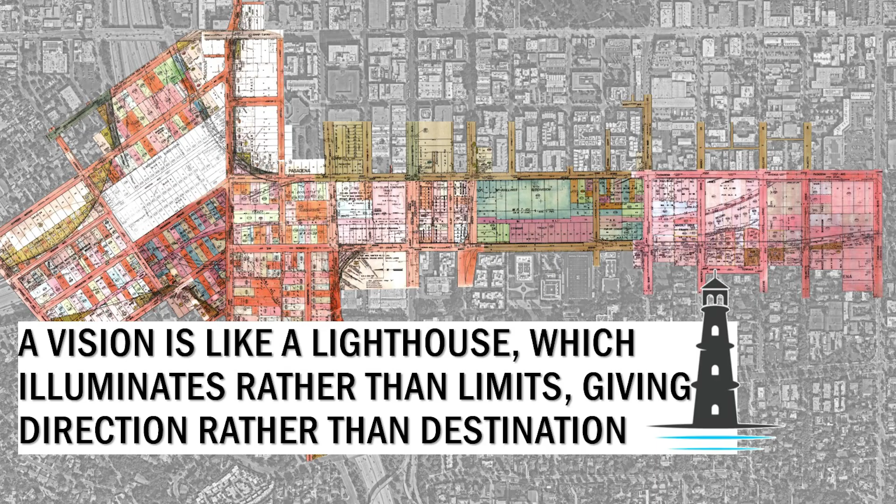I found this quote: a vision is like a lighthouse, which illuminates rather than limits, giving direction rather than destination. So our job today is really to think about where we want to go together as a community and identify our desired outcomes.

Next slide, this is the schedule. We've had three phases of this project. We started in 2024 with our discovery phase, and you've heard a fair amount about that from David and Jennifer. That's where the consultant team came on board to really try to dive into the district and see what the physical, policy, and transportation framework looks like.

Now we're in what we call options and engage. For this, we're doing a series of tests and findings, schemes and test fits. You can think of it as a series of stress tests. Then once we finish, probably in the fall, near the end of this phase, we go into what we call document and refine.

That's when we take the input gathered today from our advisory group members and the various standing committees, refine what we heard, and document it into a series of recommendations that describe these desired outcomes. That's the vision. You'll see that little lighthouse pop up every so often to remind you this is a vision plan.

This is, as you heard, our third citywide event. We've had some really fun events previously that you can check out online, with lots of materials.

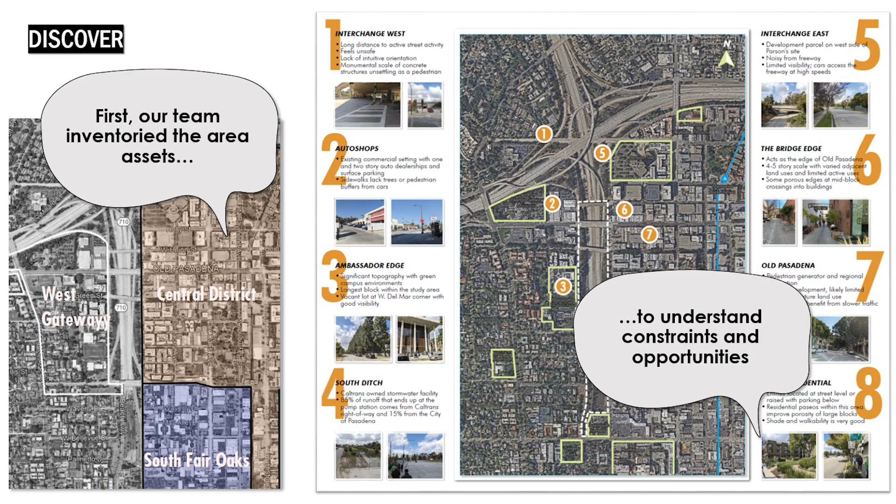With discovery, as mentioned already today, we've learned a lot about the history of this unique site, and you can see those boards in the gallery. There's a series of documents available online, and Brenda is going to walk you through that.

One of the first things that was important to do was figure out what was in the area before the displacement came. As a city, we wanted to look at three different areas. We wanted to know who was there - what people, institutions, businesses - so we hired three consultants to do a little different work for us.

The first group we hired, out of UCLA, looked at racial segregation in Pasadena and the role of freeway development and institutional mechanisms - what was it back in the 1960s and 1970s that caused a lot of our segregation, and actually prior to that. We have this amazing study completed for us by UCLA, and all of this information is available on our website. If you need to know how to get there, we'd be happy to show you.

Next, we wanted to document what was in the area, so we hired consultants named Architectural Resources Group to tell us actual numbers. Let's go to the next slide, and I'll give you a snippet of that.

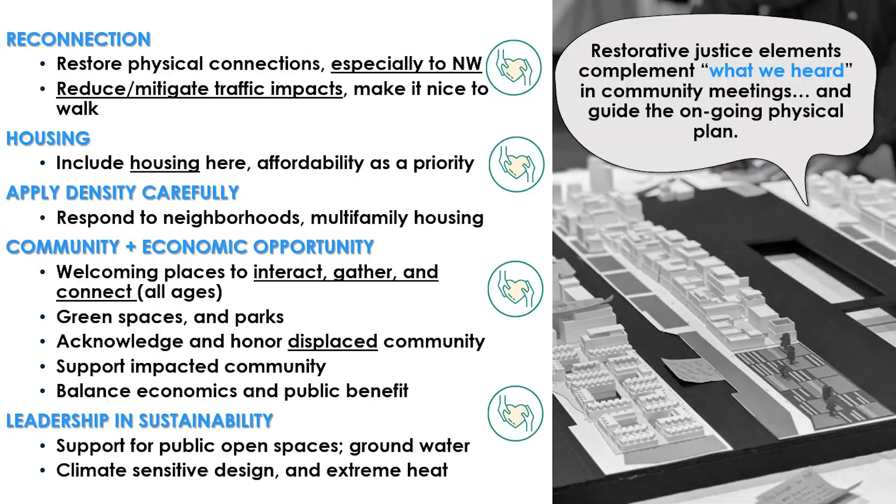And then, of course, we heard a lot about Pasadena being a leader in sustainability. So there's a lot of support for us to think about both water and power, and David brought that up earlier, as well as climate-sensitive design. We've looked at extreme heat, and those are things we're going to talk to you about as we continue.

Back to you, Brenda. What we're going to do now is just ask the panel some questions. I know we've presented a lot of information, and you're probably sitting there like, that was a lot of information, it's hard to absorb. I even see someone yawning right now. So to break that up, we want to...

Hello. Okay, so to break that up, we want to just ask the panel some questions.

So this is where I get to be Oprah a little bit. Panel members, for my first question, I'm going to give this one to David Reyes. The vision plan is described as a framework that evolves over time. How do you see this flexibility benefiting Pasadena in the long term?

I think Jennifer Page spoke about specific plans and setting forth rules and regulations for future development. None of our specific plans say you have to build a certain type of project.

So I think having flexibility in a plan is really important because we don't know what the future holds, and we don't know how long it's going to take to rebuild this area. It's not going to be that we get a plan done and it gets rebuilt the next year.

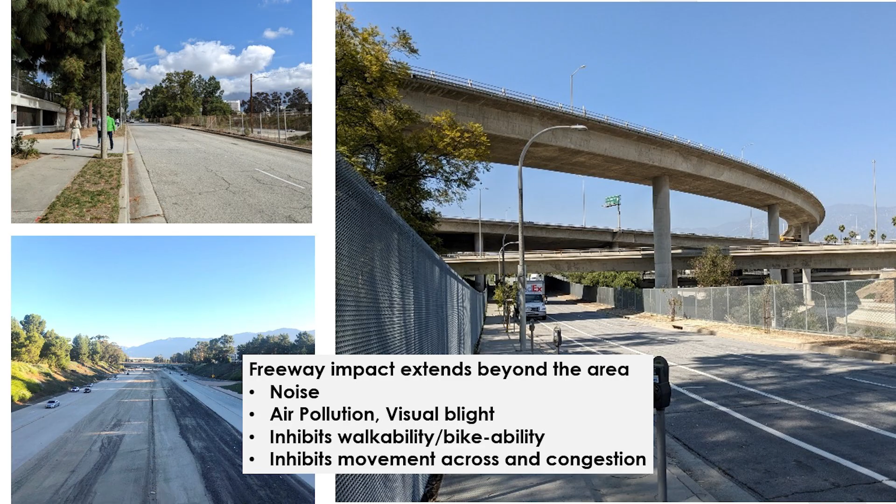As you can see from this slide, the freeway welcomes you in. Isn't it beautiful? Such a human space, kids at play. The point here is that it once was, and you can see on the boards out there, a classroom, school kids, a variety of things, and we need to put all that back. But we can only do that in a way that creates many more choices for mobility. The freeway really is a one-trick pony, a singular way of getting around. You can put some other modes in it, but the reality is it was designed for a singular purpose. So we now need to expand that to a much more holistic approach where all of us have a lot more choices about how we get around. That's everything. Next slide, please.

You can hold on to that one. I'll use this. Pardon me? Hold on to this.

Okay, got it. So a little bit expanding on what David said, think about the 21st century, but think about the 21st century and beyond. This change that happened so radically with the automobile really happened overnight in the trajectory of how our cities have grown over the years. We really need to keep in mind that what we're planning for now still needs some flexibility, to be able to move on beyond that to certain forms of mobility we maybe can't imagine today. We never would have imagined cars would be quiet for many years, and suddenly we have a problem with quiet cars. So we need to start thinking beyond that.

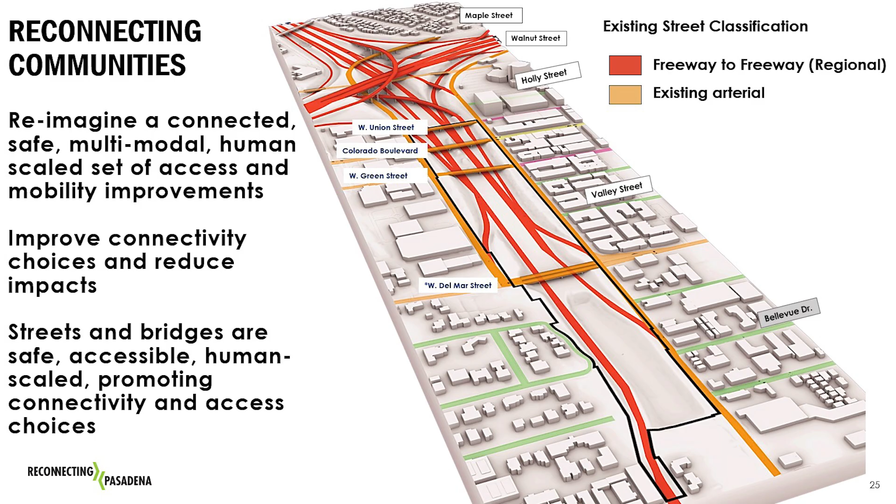If we can go to the next slide, we've had people say just take out all the red, and we're going to end up with something different. So we need to start thinking about what that looks like. How do we transition? We can't just do that overnight. We need to plan for this as an incremental change and eventually get to where we want to.

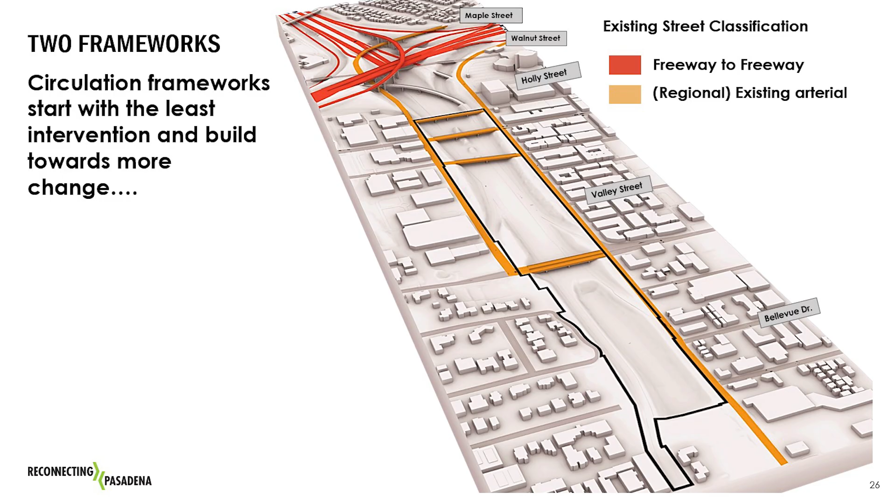But we certainly want to make this serve the local community first rather than the regional. So these streets are our prime target, the orange ones on this diagram, to try and change them from being regional serving to first be local serving. If you can go to the next slide.

In order to do that, we need to start looking at scenarios. One of the first scenarios we're looking at here, called Gardens and Terraces, really prioritizes the reuse, adaptive reuse let's call it, of St. John and South Pasadena, to see what kind of capacity and what alternatives might arise from that.

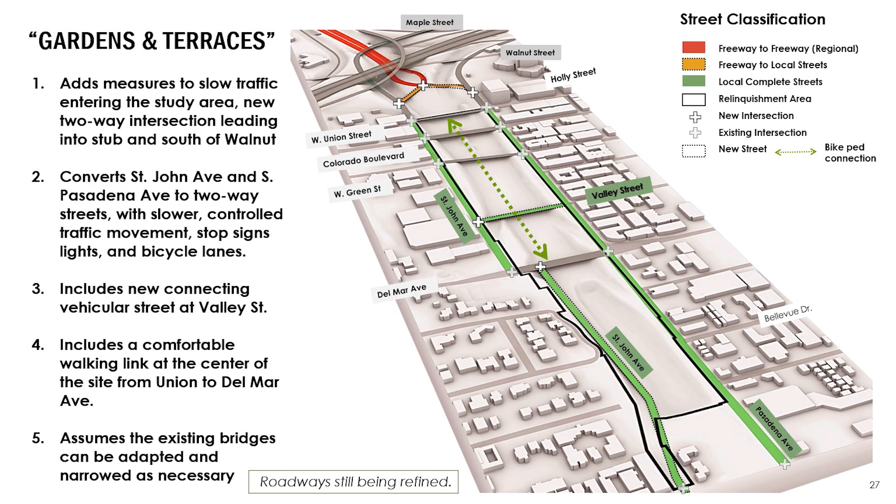Another option we're going to look at, on the next slide, is adding a new boulevard to this and keeping St. John, keeping South Pasadena, but making them much more local, low-key, so that we can really connect old Pasadena across into the new development, and connect the west side where Maranatha colleges and schools and all of that into the community, making a much more seamless connection to whatever new comes along.

But we want to make these streets more well-behaved. So we're not choosing one at this point. We've got scenarios here that allow us to test these.

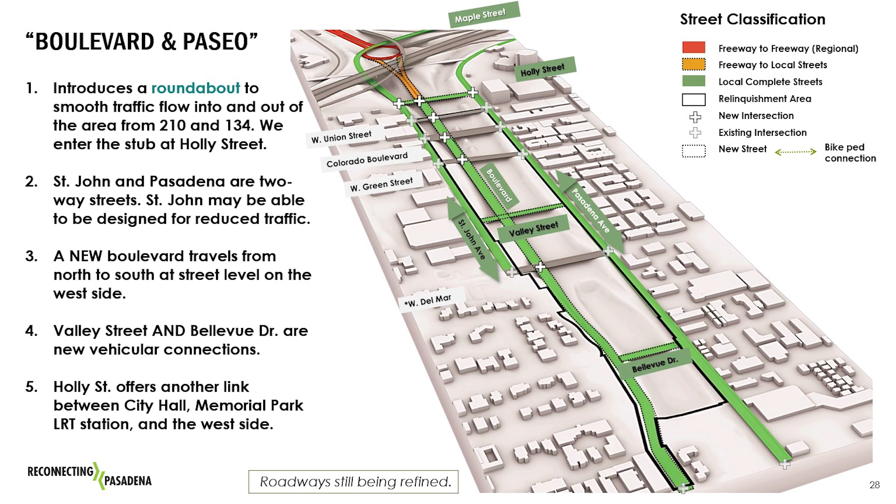In doing all of this, we have to look at how we impact or reconnect to the regional system. As you can see, we have far less red and orange at the top of the slide. We think we can manage to push all of that fast-moving traffic, slow down the traffic much earlier as they come down the freeway or as they're moving along it, get rid of signs that basically invite you to take a shortcut through the neighborhood, and start to change people's minds over time as we go through this.

So a lot of our testing that we're doing today is around these two scenarios, I'm going to say, but they're by no means the only options we have to move forward with. If you can go to the next slide.

This is when you see them compared to one another. The first one, as I mentioned, was all red. There are 21 intersections out there today. They all deal with freeway, arterial traffic connecting freeways and on-ramps and off-ramps. That's why it's an unpleasant environment, because none of those intersections have been designed with you as a pedestrian in mind as first and foremost, and making it easy for you to navigate that and making the traffic more well-behaved.

We want to be able to move through testing various scenarios to try and get everything green as much as possible. You can see in the middle image there, with the numbers 27 and 30, those are the numbers of intersections. We want to add intersections. Adding intersections slows traffic, gives you more options as a pedestrian or cyclist or using alternative mobility to make choices about moving east and west across the site and reconnecting the neighborhoods, as well as moving north and south through this neighborhood. We really want to push any of this to as green as possible and as many intersections as possible, so you have those choices.

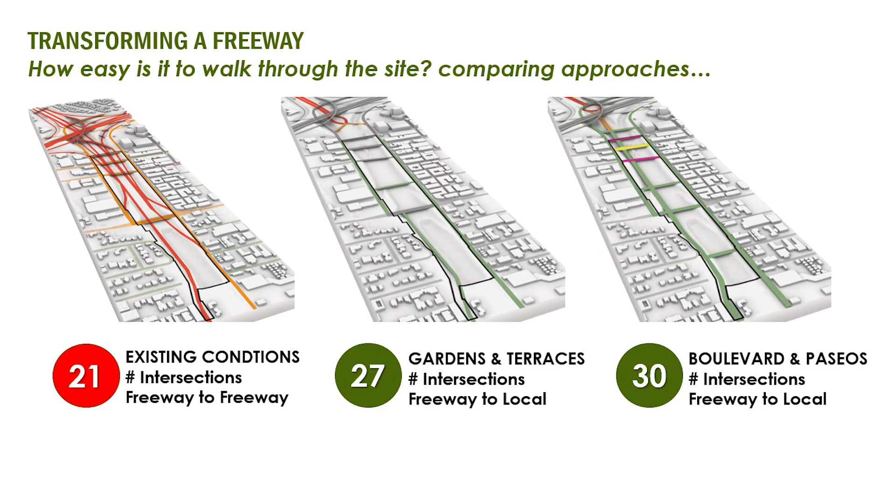Next slide. We're going to get a little bit into the weeds here on the character of these, but I'll move fairly quickly through them. The first one, again, we just talked about — this is just showing you in detail how many intersections we have that are orange and red.

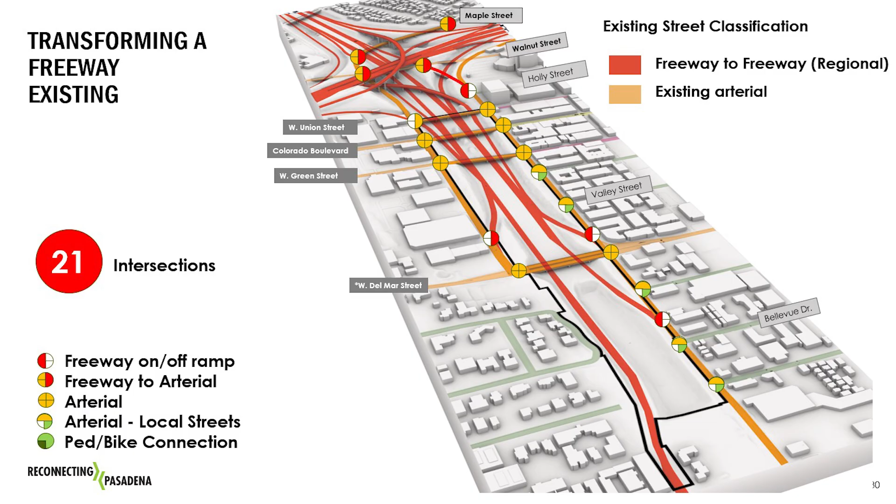Only when you really make some radical decisions about severing ourselves from the freeway and reconnecting in a different fashion can we start to become greener and more compatible with pedestrians. You'll see the legend in the bottom corner really starts to indicate the character of those intersections, that the streets are narrow enough to navigate, with bicycles and pedestrians, etc.

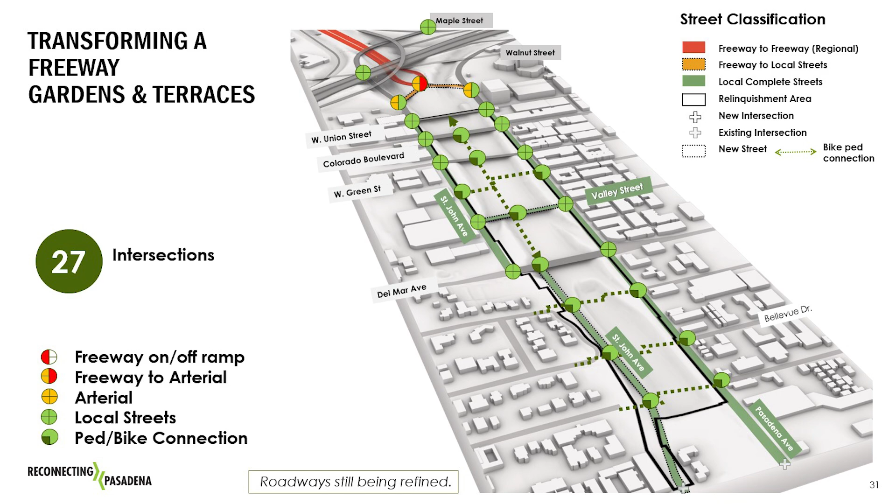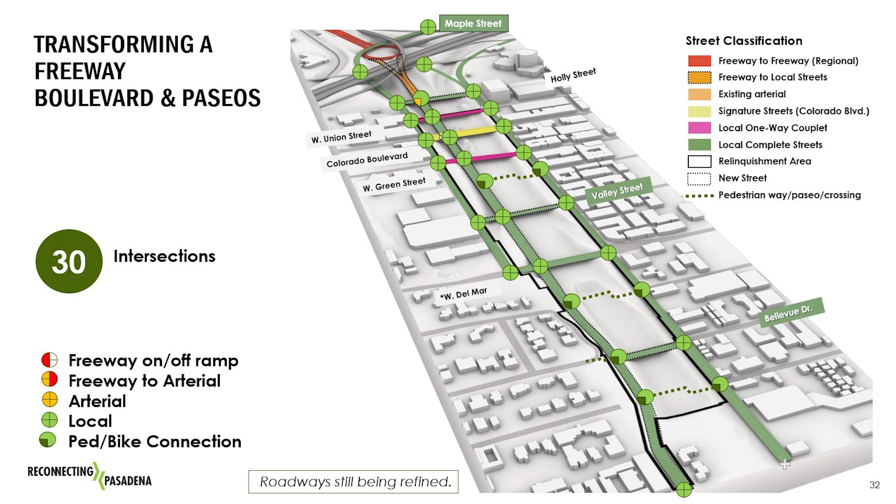Eventually, when you get to the third scenario, adding a boulevard, you get to the 30 intersections. If we can have the next slide. And then in addition to this, there are other levers we can use to really change the character and nature of this. If we can go to the next slide.

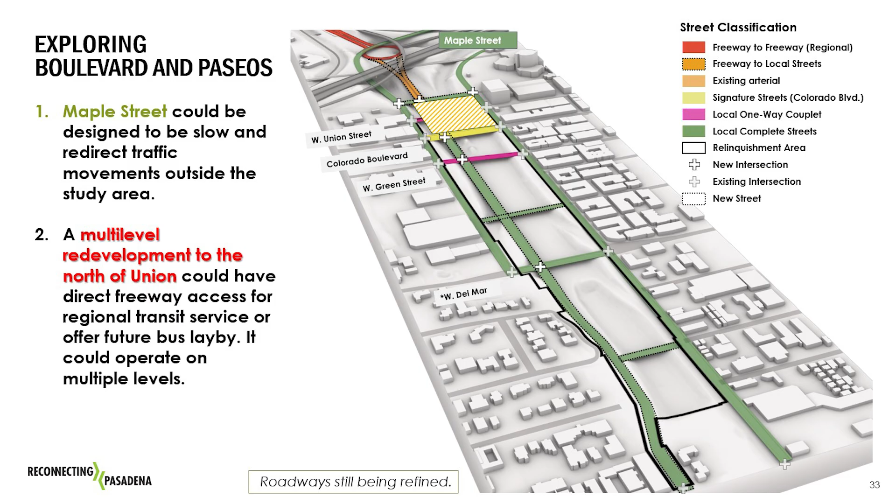We want to think about the area that currently is not in the relinquishment area. Anything north of Union is currently not city-owned. But we want to work with the agencies looking at regional transportation and the interface between that and the city, to see whether in those blocks we can intercept and reconnect ourselves and join that conversation about regional traffic, and perhaps a multimodal facility or transit interceptor that gets people off the freeway without forcing them onto city streets unnecessarily. So there are lots of opportunities to make that happen.

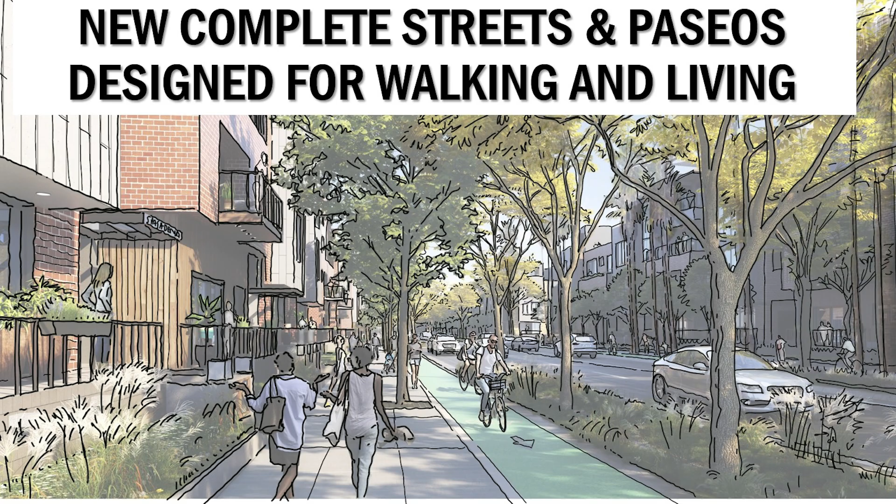So we do want to ask our panelists a few questions, and I want to acknowledge that Deepak from Iteris has joined us, our transportation consultant. This first question I want to throw out to David Granis: what do you see as the biggest challenges to transforming and recreating the 710 Stub into a walkable, connected neighborhood?

Well, thank you. I think greatly what I've alluded to in previous comments, but I'll recontextualize it a little. I think first and foremost, overcoming the fear of changing this from a freeway to something more localized. Now, for the people in this room, that may not be a fear. For others, though, there are people out there who think the freeway is a great thing and that we should reconnect it, not disconnect it. So overcoming that.

Focusing on the future and the opportunity of connecting, reconnecting all these neighborhoods, all the destinations in the city, and doing so in such a way that is economically, environmentally, and equitably vibrant and functional. So in short, got to make sure it works, right? But I think that's really the important part—overcoming the past, focusing on the future, and ensuring this functionally works and meets the vision, meets the standards, meets the aspirations of the community, and that can be realized. So I think those variables are quite important.

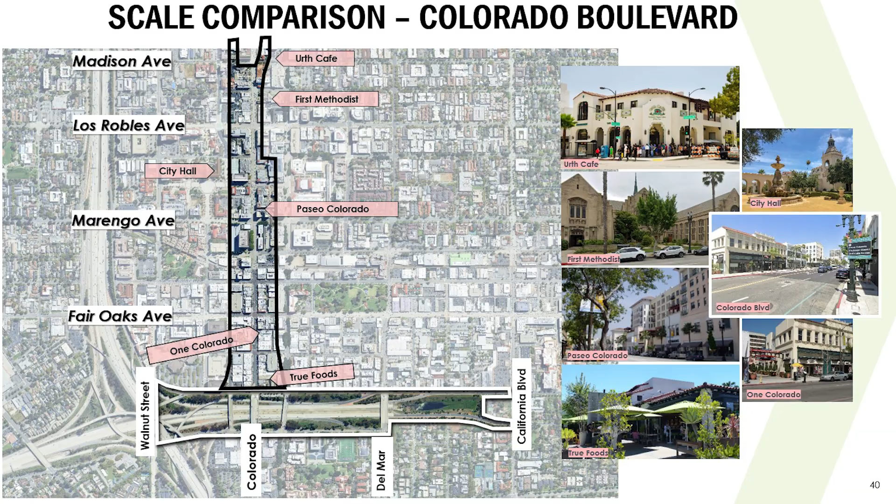None of what happened there would have happened without intention, without a specific plan, with a lot of community involvement over time, many architects, many developers, mistakes along the way and having to come back and fix them. But it's a huge opportunity and we should not take this lightly.

This is something you all should participate in, because this could be as influential as that image of Colorado, of Pasadena, of what Colorado is for you as a community. It could be as important moving forward for the next generation or generations to come.

That's why the foundational mobility in street and block is really, really important, because it's going to set the stage. It's going to create the new addresses, like Colorado Boulevard is a great address. We have the opportunity to create a great address on Colorado Boulevard, on Del Mar, on the streets that cross over, as well as the new north-south street.

So I just wanted to share that with you. What we're talking about today, in the next few slides, is really the scale of that development, how big and how much.

One of the reasons for adding additional north-south streets is to help define the form of the city. We know that smaller blocks in cities guarantee more walking and connectivity, lots of nuance, lots of ways to get through. That's one of the reasons for showing that.

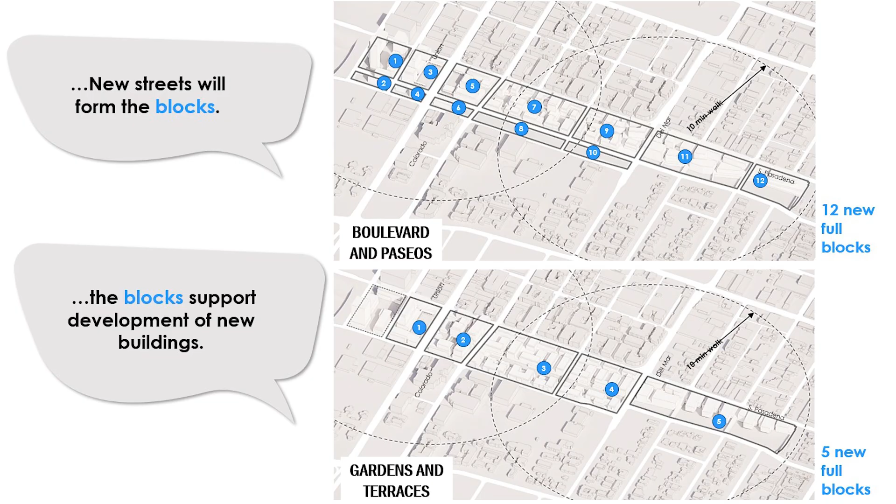Here you see some of the opportunities we'd have to define the east-west connections and get people to move through it, to break up the scale and make it smaller and more intimate as we move through. Both of these have opportunities to do that.

The way this would unfold, and the relationship between the city and the developers, would be slightly different for each opportunity in how we create and guarantee those east-west connections, as well as the new north-south connections. But we're really focused on the public realm.

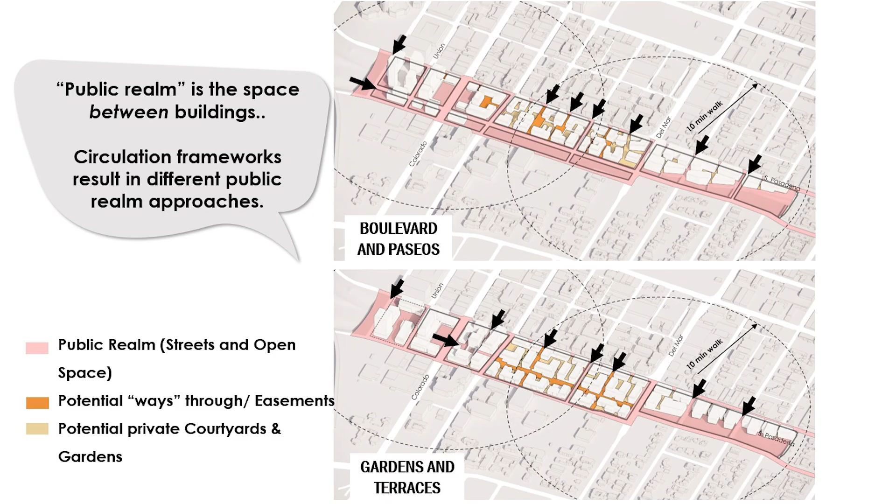I think that's the most important thing about the form making. We should be thinking about what those streets look like, what those plazas look like, what the interfaces on Colorado, on Green Street, on Del Mar, at Holly Street look like. Does Holly Street continue through, or does it already not connect?

We want to get your input again on what features you think support reconnection. Vaughn just walked you through what those could possibly be. So if you could vote, and again remember that option G is not available, but we have more cards if you handed in your card already.

In terms of reconnection: paseos, those walking areas, new streets, public gathering. Let me start over. Would you like to say A, paseos; B, new streets; C, public gathering spaces; D, cultural spaces and memorials; E, active recreation spaces; F, all of the above? Or if you'd like to write in an answer, write that on your card, and we have folks in the aisle who will collect those cards. Again, if you need a new card, just raise your hand and we'll get you one. So we'll pause for a moment and let you vote.

Okay, so the votes are still coming in. For those who can't read them, I think we've got all of the above as the resounding winner, but I think all of those attributes are ones we should work towards. I think there's maybe less understanding or interest in what the streets do from a form-making point of view, so we'll work to get that number more balanced. I think the idea would be to eventually get this to be more of a straight line, a balanced idea of what these elements are and how they contribute.

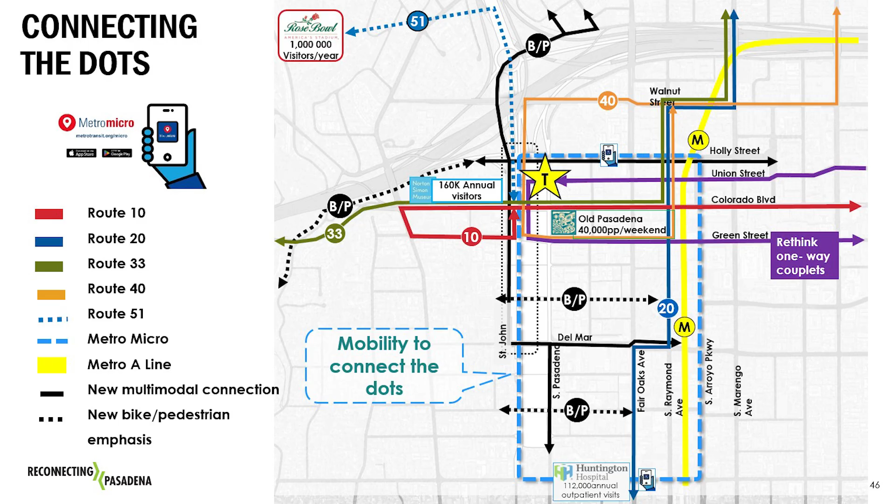We want to add to that inventory, and on this diagram you can see there's an abundance of opportunity to do that, whether it's linking microbuses, tying into a regional system of transit, or creating a parking reserve for major events in the city, helping people get from downtown to Pasadena or even into Pasadena as a destination to go shopping, knowing you can do it without bringing your car. You can get on public transit and walk freely within this greater part of downtown. So we want to think about connecting the dots as we go through this, making it as user-friendly as possible for every mode of transit within the city.

And to help us think through that, Deepak, if you can go through the next few slides. Thanks, Juan. Our mobility vision for this project comes from the understanding that in order to reconnect this community to what it once was, we've got to emphasize tools and strategies to make this a more multimodal transportation area, accessible for all modes of transportation — complete streets, like you've been hearing. There's really two questions that we're looking at.

There are two questions we want to answer as part of this. Reminder of how we got here: through that relinquishment study completed a few years ago working with Caltrans, which was more of a fatal flaw analysis. Now we're into the planning phase.

The first question is how can the city use this area to create a multimodal set of transportation choices to improve access, mobility, and safety, and connect people to their daily lives. The second question is how can we enhance access and mobility to reduce congestion, improve safety, and enhance quality of life through this mobility plan.

So what we're studying right now, we've looked at locations in this general study area that currently have congestion at intersections and segments, and we're focusing on where this project's impacts will lie and how we can improve those impacted areas through a set of tools, ranging from transit tools to complete streets tools, thinking about connection to the freeway and to other neighborhoods in a comprehensive manner, returning this area to where it once was with a mix of uses and urban framework.

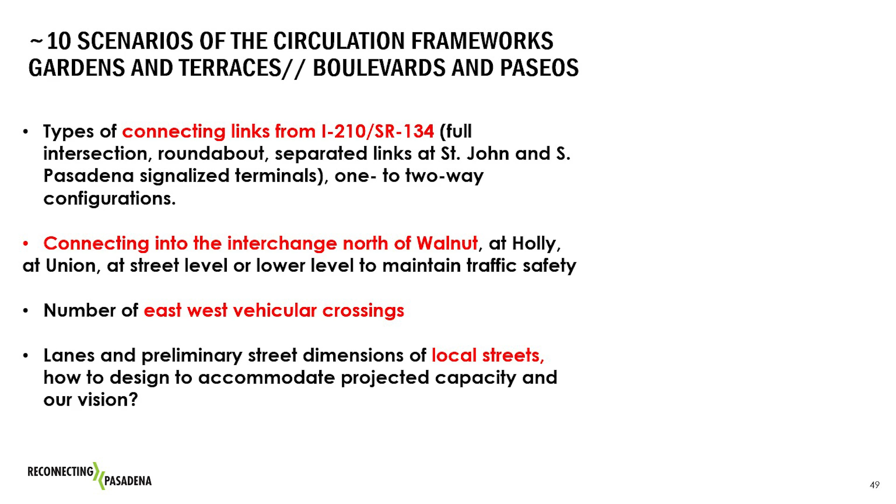And then the east-west crossings, a variation of where new east-west crossings such as Bellevue, Holly, Valley—mentioned across the ditch area that aren't crossed today—could be added to various design groupings. And then the overall lanes and street classifications of all roads in the study area, functioning either as local streets or streets that can accommodate the projected demand in terms of land use.

As I talked about in the panel question, what we've seen initially is that adding a north-south boulevard could help spread out traffic by adding some capacity, allowing flexibility in how you design St. John and Pasadena—or redesign them to be more complete streets, slower streets on the bookends of the project. That's along with the boulevards and paseos design grouping, and it may give us a stronger approach to build upon. That's what we're seeing in early observations, but it's obviously very preliminary.

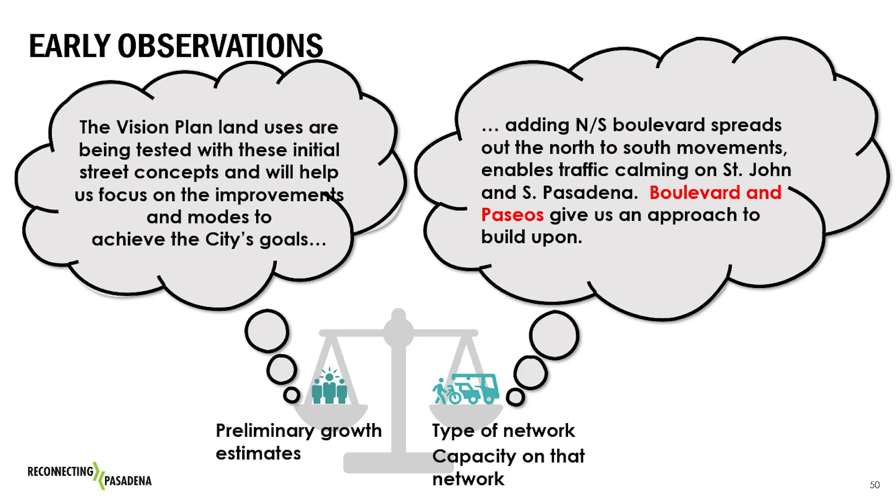Creating a new boulevard potentially, more transit connectivity, enhanced pedestrian amenities, reducing trips using other transit options like microtransit and emerging technologies that may not even be conjured up yet, and enhancing the city's rideshare van pool, the TMA Association. All of these together, when used in combination, can help move the needle to reduce both vehicle trip magnitude and trip distances through the area.

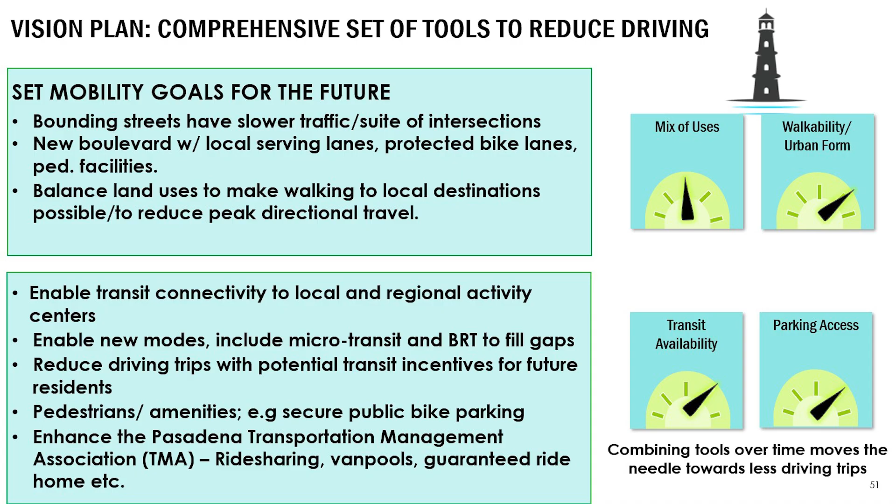Thinking about things regionally, as we've talked about, the connection to the freeway, as we envision this plan, our study will include evaluating the connections to the 134 and 210, and thinking about how to decelerate and slow down the traffic ending where the freeway ends at this project.

So different options for that, and different options for how to directionally sign the freeway as traffic approaches this area, to really discourage and alleviate cut-through traffic, which happens today, and work with Caltrans as an iterative process to discuss where it is most appropriate to terminate the 210 freeway, for example north of Union Street, because south of Union Street is the relinquishment area, but we're working with Caltrans to discuss where that could be done, potentially further north.

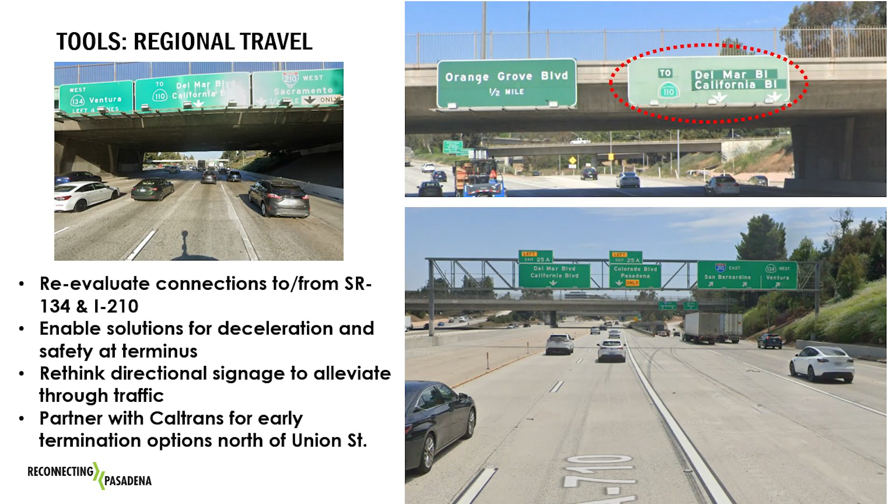So this is still to be designed as currently shown. It's below grade, below the Maple overcrossing. But I'm going to hand it over to Vaughn, and he's going to talk a little bit more about the gateway and connection. Thanks, Deepak.

I think it should also be mentioned that the relinquishment plan did not come with the full disentanglement of all the spaghetti that's out there. So this is an opportunity to really make this a much more pedestrian or human-centered connection in the rest of the city, getting rid of as much of that spaghetti as possible. But really a great gateway opportunity.

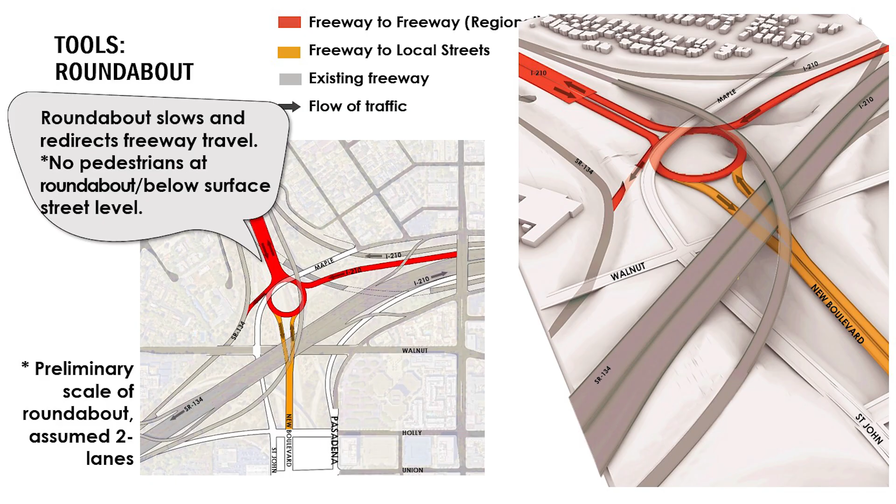Everybody who leaves the freeway is slowed down to 25 miles an hour, entering a city as they get to this roundabout and move back into the southern portion of the relinquishment area, our study area.

And then what that allows us to do is to really rethink that whole northern area. Again, this is not currently in the relinquishment area, but we do think Holly Street is an important access in the city. It leads you directly to City Hall. There's been a lot of interest in bringing that through and connecting to it in a better way. Right now it sort of peters out at the edge of the freeway on South Pasadena. We want to bring that to a great place within the city at the northern end of the stub. So that's what you're seeing here.

And redo the ramp that is Maple Street. Right now it's really an off-ramp, and even though it has a small bikeway and sidewalk on it, it's not really a great, comfortable environment, and we want to take that back and make it a pedestrian connection. And then also think about connections westward.

How do we get down to the Arroyo? Are there opportunities to really make Holly Street continue all the way west through the city?

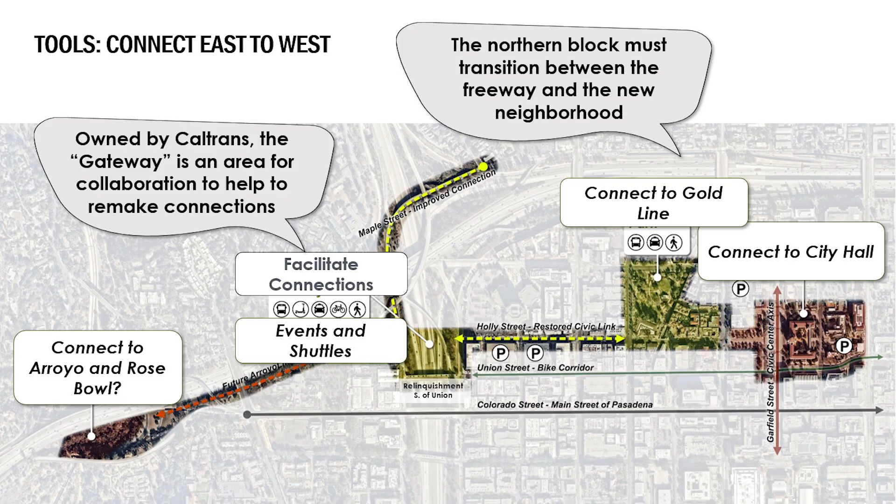So we're going to be looking at this as being pedestrian-only, or pedestrian and bikes, or having one lane of mixed-use traffic perhaps, so that we can have cars there and give you a sense of security and a sense of place along there at all times of the day. But it gives you an example of how we're thinking of repurposing some of these elements.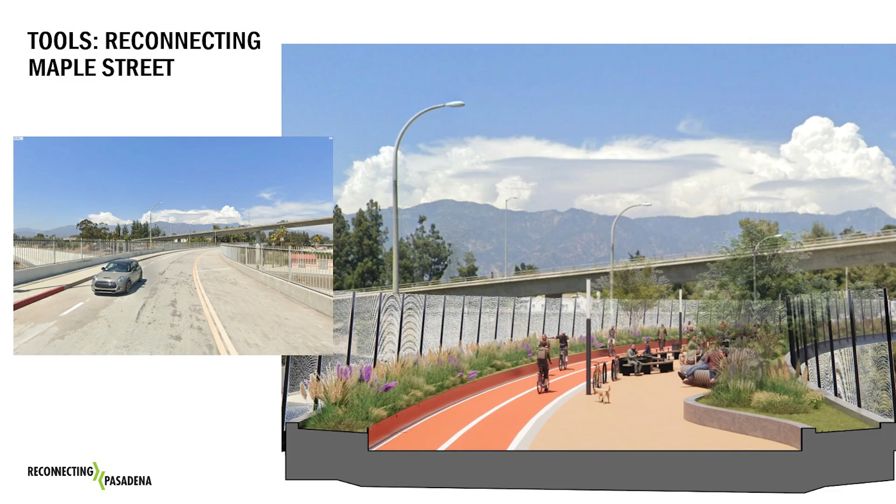And as you come into this transit facility, if we can work with Caltrans and the agencies, this is to Jennifer's example of the layer cake. This is our layer cake of transit. On the lower level would be all those uses and things that we do not want to come into the city.

If you think of layering on top of that, it gives us the freedom to have an urban plaza or a place above that has discrete ways of getting down below and connecting vertically. There might be shops, amenities that serve those functional aspects of changing mobilities from a bicycle to a bus, or from a local bus on the surface to a regional bus below, making that an amenitized urban space.

And then thinking about private sector development that might happen on top of that—whether cultural uses, residential, or office uses—there's a third level of development that we want to make sure, if we're thinking about this with the agencies, that we make them partners in that project moving forward. So this has got sort of a life of its own at the northern end, but this is how we think about it as a layer cake, so we can really get some added value out of intercepting this freeway earlier.

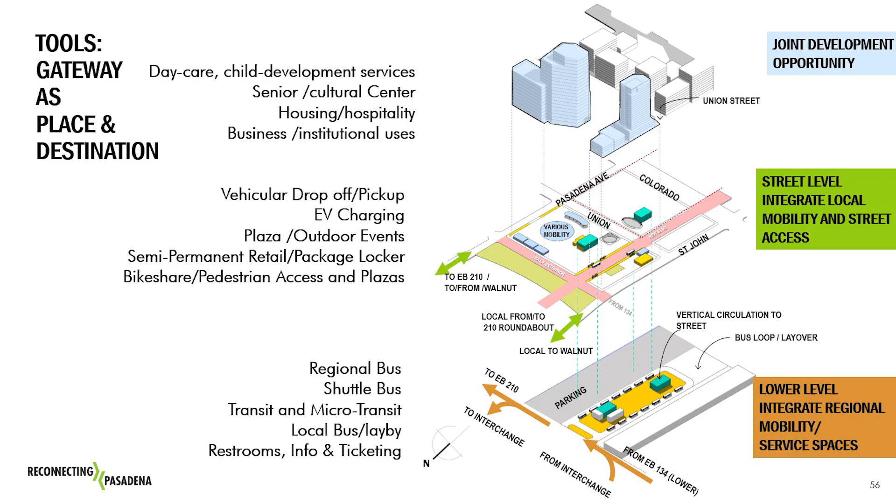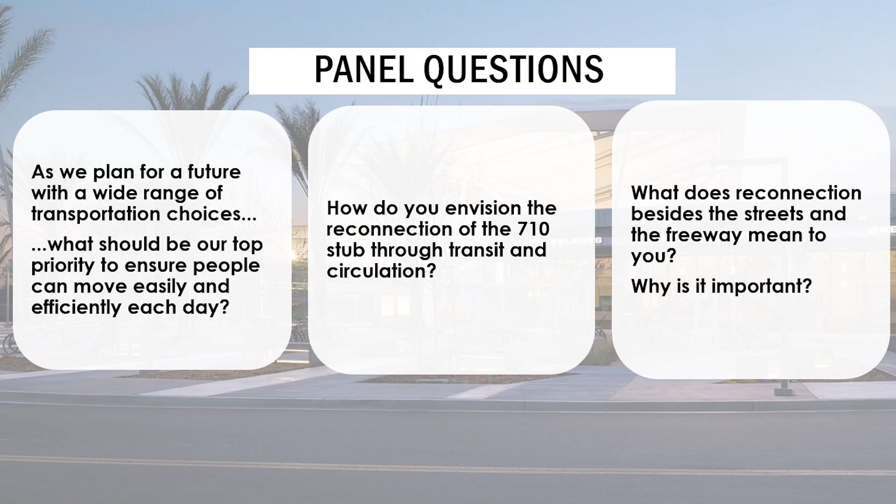And there will go some questions. Okay, so again, we have some questions for the panelists. I'm going to ask David Granis to take on question number 1, which is: as we plan for a future with a wide range of transportation choices, what should be our top priority to ensure people can move easily and efficiently each day?

Thank you, Brenda. Good morning. I think my big takeaway—in many past lives I was a planning and transportation deputy to a member of the LA City Council eons ago, and I got to work on the '84 Olympic Games. The city played a pretty proactive role in preparing, and as those of us around then recall, there wasn't anything in the way of rail transit on the ground. It was buses and streets.

In fact, the athletes rode to the games in school buses, and we as attendees went to these events in RTD buses, the old Rapid Transit District. What I learned from that is the most important thing we can do is provide as many choices as possible. That's what happened during '84—we provided lots of choices for the aerospace employees in the 405 corridor, for downtown workers, for schools, for every aspect of daily connectivity in Los Angeles.

That big picture was lots of different choices—flex work, deliveries done at different hours. So as we think about this, we need to think in terms of more, not less. Deepak talked a lot in some of his slides about how those choices line up, but that's really the most important element. It may sound generic, but it's critically important—the more choices, the more connectivity, the more accessibility.

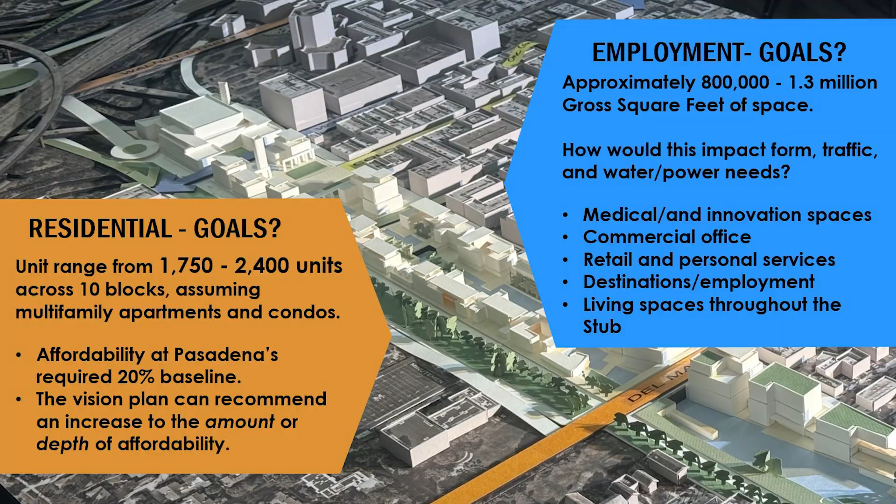So if we go to the next slide, what does that mean? At this stage, the land uses are very, very flexible, and we want to maintain, as David mentioned earlier, that flexibility. But we do need some structure to hang our ideas off of, right? And so that's what this is showing here.

Vaughn will actually walk you through each of these different kind of neighborhoods. So we can think of land use as creating the building blocks of neighborhoods. The way we as planners think about it, and that's something Jennifer spoke about earlier, is we try to look at adjacencies, look at what's there today and make a logical handshake with that type of use. So what we have at the northern end of the stub, we're calling the gateway or partnering location.

That's this mobility piece that we just talked to you about. That could be something like a cultural destination or hospitality or a commercial use, a use that's not really going to be overly impacted by being right next to the freeway.

Just south of that, we have this, what we're calling this civic, cultural, commercial emphasis. That's right around Colorado. We all know Colorado is Pasadena's signature street. We know there's a historic district there, 2 to 3 story buildings. So in our vision framework, what we're thinking about is this is a mixed urban environment that builds off of that signature street and what we see in old Pasadena.

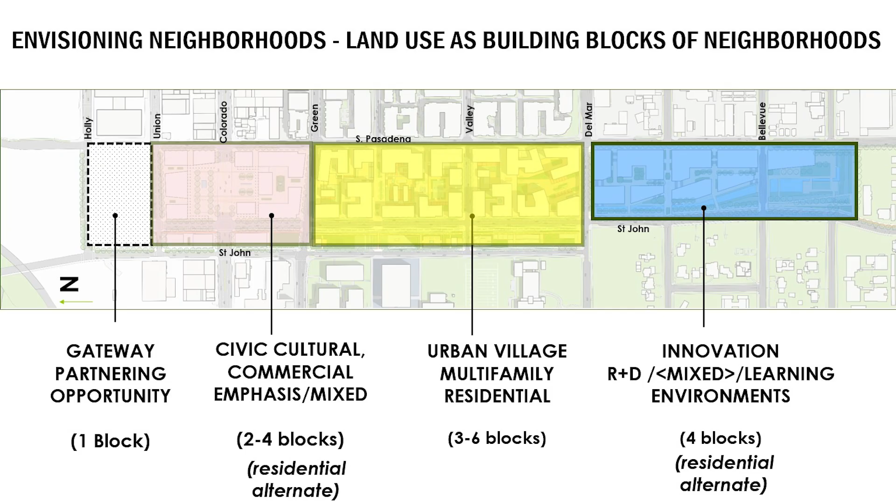Can you hear me? Yeah. Just to put a little bit of color on some of these notions that Kate has talked about. So Colorado Boulevard, this again is a very high level of what if, and a what if that we want to probably get a reaction to.

If we thought about Colorado Boulevard as being a great civic space at that point, something that's akin to the character of an urban civic space like City Hall is, you could imagine from an image like this, so if you could step back from the street wall, the edge of those buildings, you could get great vistas of the mountains. There'd be an opportunity to really see yourself on Colorado Boulevard in the context of the mountains.

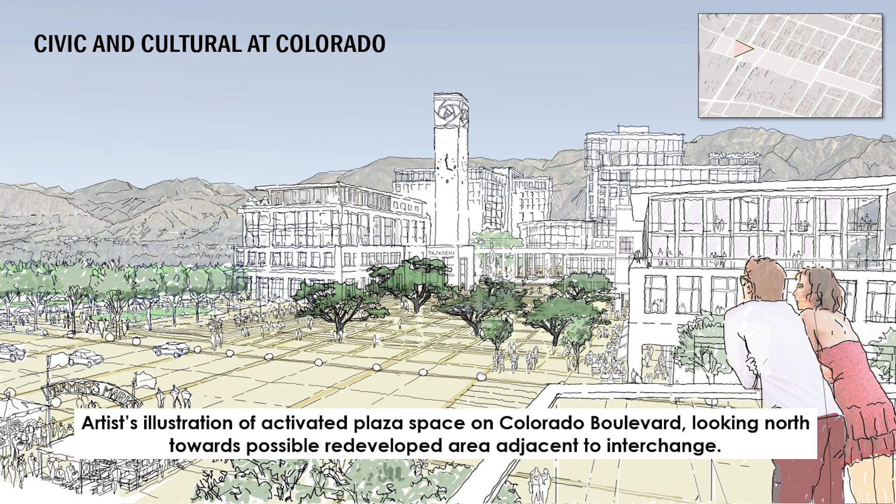So we're imagining one of the options or one of the ideas could be to widen the street, open up the street here, create a beautiful public space that could be used on weekends, could be used off-peak hours, could be a great gathering place for the city, framed by buildings that are primarily 2-story at the lower level, and taller buildings maybe set back beyond that as you move away from the street.

The next image is a place where maybe the community can gather, where we can remember, celebrate spaces, celebrate events in the city. We want perhaps the flavor of this to be akin to what we have at City Hall.

With these beautiful gardens, large mature trees able to grow, great urban spaces that you can celebrate, perhaps some beautiful murals that celebrate and remember the people and places that were here before us. Places to have farmers markets and open this up for art fairs and all the great cultural events.

We don't have space for those on that main street. So when you do use it, you would divert traffic around to Green Street and Union, which are already one-way streets, so you could really capture this for those great events. And the Rose Bowl Parade would still continue through this space.

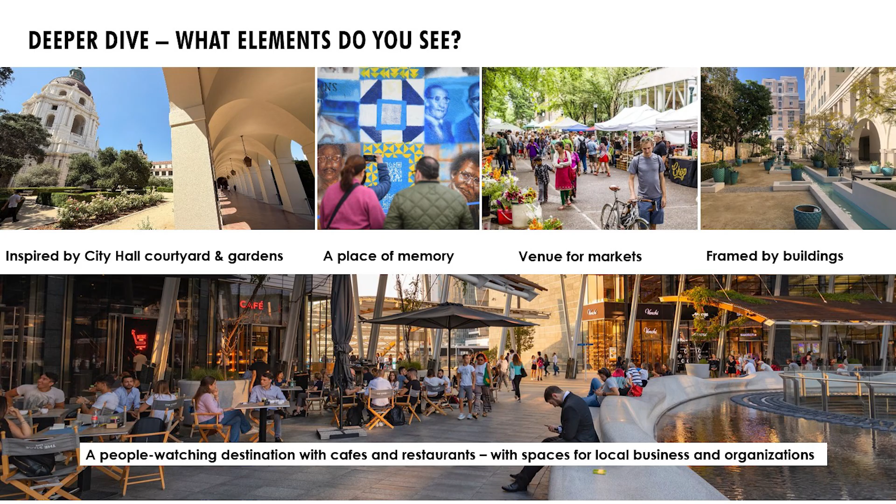The bottom image is really just a contemporary image of people watching, cafes and dining, and that could be a complement to what you already have on Colorado. We don't see it as lots of shops per se, but something that complements and grows the capacity for downtown.

The next image gives you a sense of the scale of what the space might be like. The first one on the left-hand side is showing a space that's just like the gardens at City Hall.

Next time you visit City Hall, spend some time in that beautiful courtyard and garden with those four big live oak trees and the arcades around the edges, a beautiful shaded personal space — you could imagine it being the scale and size of that.

The one on the right-hand side is a little bit larger. It intersects a bit with what we think of as the greenway, which might be on the west side of the street with the new boulevard. So a more garden-like experience as you move further west, but something larger.

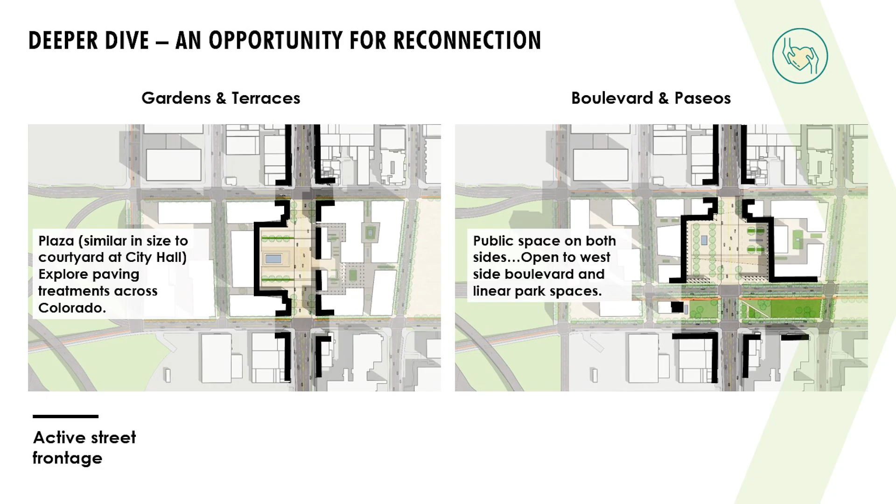These are all the kinds of things and questions we'd want you to give us feedback on as we go through the next phase of design. We'll be elaborating on these and bringing them back to you as we move forward. So hopefully that gives you an image of what we're thinking for the civic celebration of Colorado Boulevard.

Think of it as a great place. In the central area, whether it's a greenway or the gardens and terraces, we introduce a lot more park-like environment. We'll be able to build down, step down and terrace into the ditch that we have today. So we're not going to fill the whole thing with parking.

We're not going to fill the whole thing with dirt. We want to take advantage of the topography that's there, and you could have a series of beautiful parks and gardens nested in with the residential buildings that Kate mentioned.

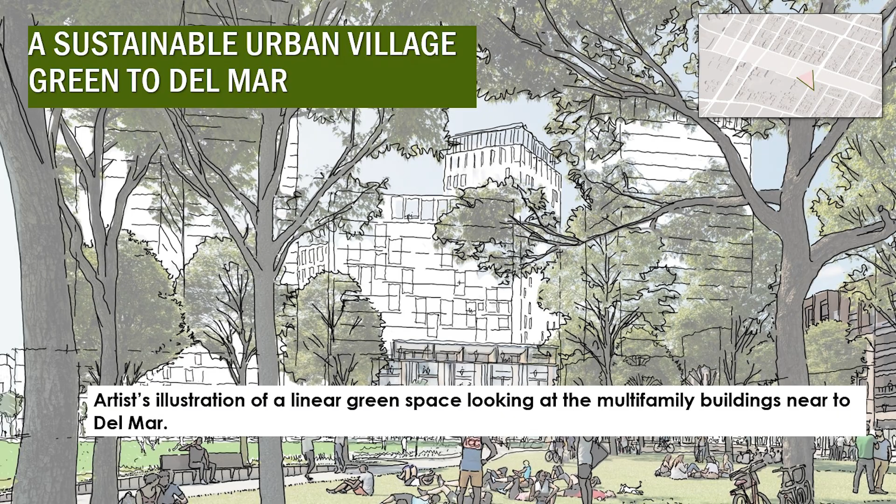A little bit of a sense of the scale of those buildings in the next slide — we want to make sure we're working with current development patterns, the building typologies that we see around here.

We don't want to make it difficult for developers to do things, but we do want to make them well-behaved. So we'll work with you and Jennifer and her team to make sure the guidelines and constraints that come with specific plans are built into the anticipated future designs for this.

So we get well-behaved buildings, well-crafted public open spaces, the right scale of buildings where they meet the street, and setbacks for those spaces, so we can get gardens and terraces and some breathing room for the community in those beautiful neighborhoods.

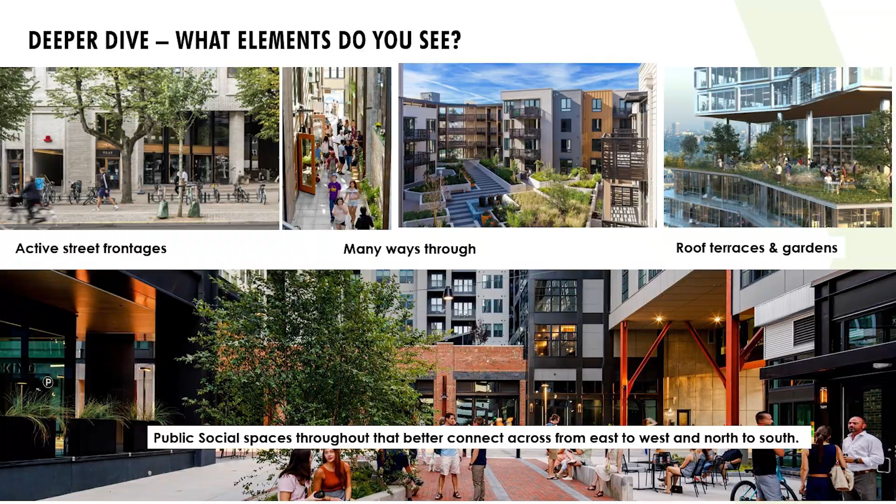And the next slide, then I'll pass it on to Kate for the last district. But when we think about the ways through, other than the streets, there are these beautiful paseos.

These could be wonderful places of discovery. You have them all over the city. All your alleyways in Old Pasadena have been redesigned, and they become these beautiful walking spaces. And we can require those, we can encourage those in all the developments that we move forward on. So you could imagine a replication of One Colorado, those beautiful courtyards and gardens and spaces, being replicated in a myriad of different ways to allow many ways through this site.

The plan in the next image gives you these two images; it can be applied in both instances. There would be the gardens and terraces. We would try to get more of a linear garden space in the center that developers would contribute to, and the city would work with to get a garden space or green space within that.

So you see South Pasadena on the top of the slide and St. John at the bottom, and the green space through the middle. That would be the series of gardens and terraces we have, with lots of connections and ways to get back up through. The little section in the corner shows how you would climb up through stairs and terraces to the upper levels.

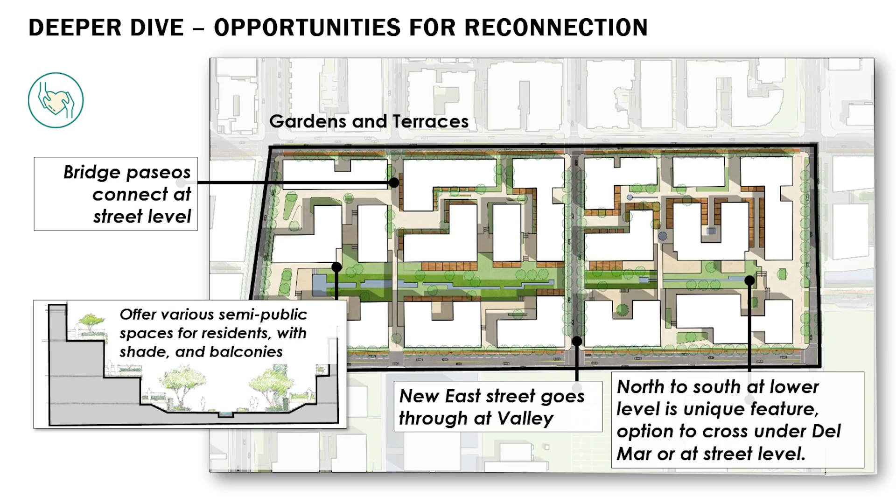The next image shows that space moved to the west, so it's adjacent to the new boulevard and St. John, creating more of a garden-like experience on the west side, still with lots of gardens and terraces between the residential developments, but with the public right-of-way being able to be built all at once. I think that's the big difference between these two.

The gardens and terraces would happen over time with each of the developments as you move through the space, because of the nature of where it is in the bottom of the ditch. This would be really at the level of St. John and would be a great urban public realm that would be developed all at once as a new north-south spine.

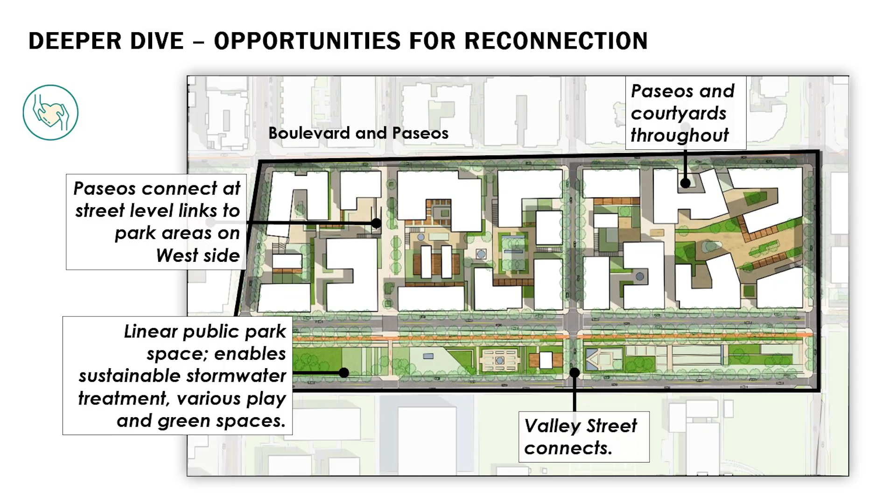So we have a few more. If we go to our next slide, it's time for questions again to the panel. I know the hour is drawing late, so we want brief responses to these. Our first question is for Vaughn.

Vaughn, what strategies help ensure new developments include affordable housing and community-serving uses? There are three main ways. One, we start with the existing inclusionary zoning program that Pasadena already has, which assumes 20% of units at 90% AMI. Then, with our restorative justice and economic consultants, we'll investigate the amount and depth of affordability that can be supported here, and include that as a recommendation in the vision plan. Thirdly, we need to consider implementation strategies and the scale and location of potential sites for affordable housing developers, then identify those developers and work with them as partners in the next phases of this project to make sure the development strategy fits their profile.

Kate, do you want to take the next question: how does density relate to existing neighborhood character, and what neighborhood assets should be considered? This is a lot of what we did in our discovery phase, and what we talked to our community members about, and want to reflect in the vision plan. When we talk about assets, we're talking about the Norton Simon, the Ambassador Auditorium, this location we're sitting in today, as well as schools, and we want to reflect in the vision plan recommendations on how we leverage those assets in this new neighborhood.

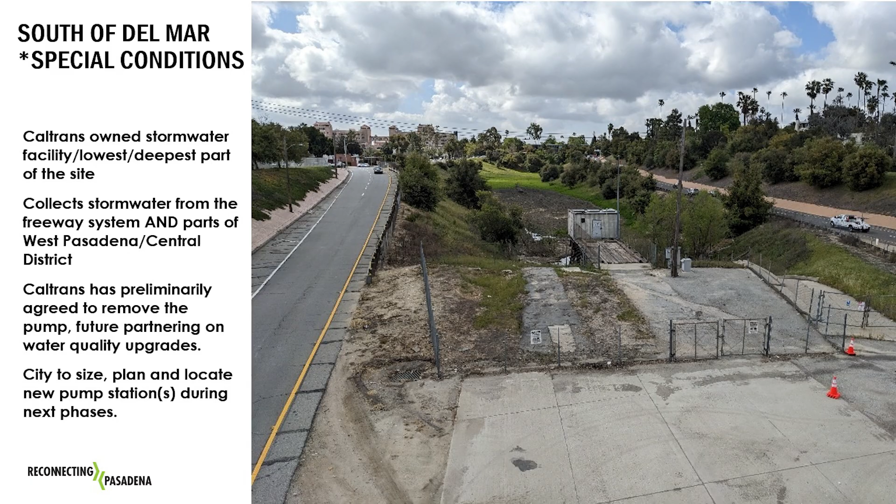So if you look at the next slide, that gives us a lot of opportunity to think about water in a very progressive way, not only as something that we're reusing and recirculating. The scale of the project gives us a lot of different opportunities to think about a system-wide strategy for stormwater to be reused, not only from those projects located in our study area, but also stormwater coming onto the site from other parts of the city.

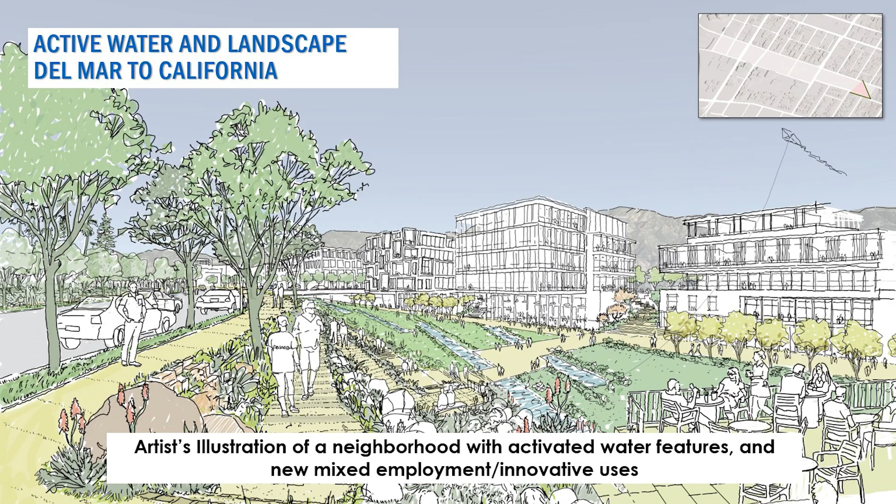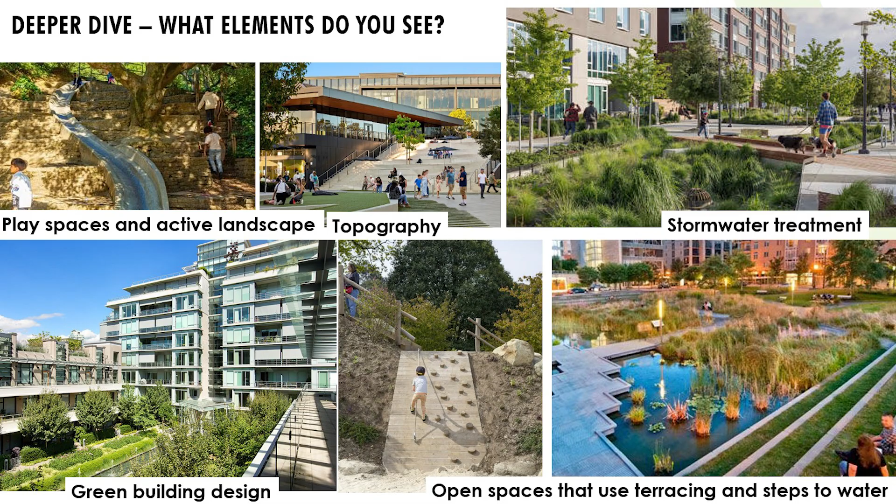And then we also have on this image some different green building systems that we've talked about a little bit, and play spaces and active landscape. These are some of the ideas or desired outcomes that we can put in the vision plan, as well as the images and precedents of places that we want to see.

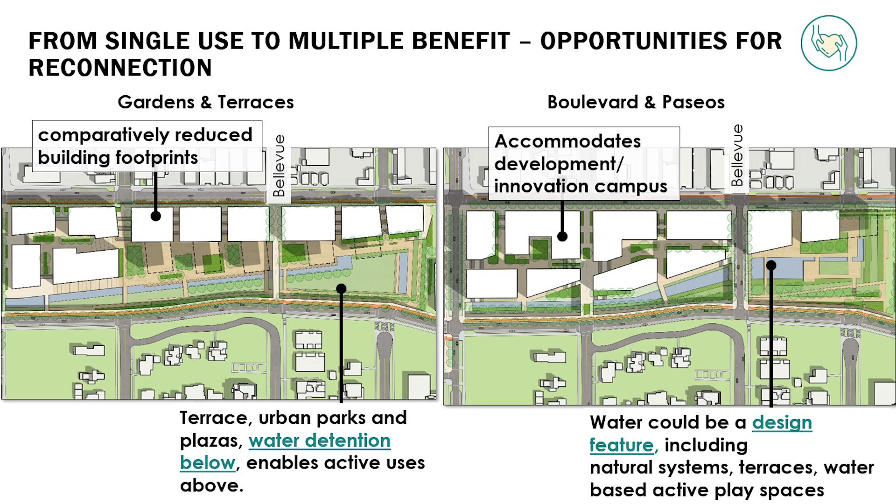On the other side, on boulevards and paseos, there's an opportunity to think about water really specifically as a design feature. And so that means thinking a little bit differently about natural systems, those terraces, even water-based active play spaces.

So you're really taking advantage of the topography and creating a different kind of experience and neighborhood that could be designed with sustainability in mind, with partners engaging with you in the design of that public realm. There's a fair amount of different ways it could be treated. What we want to put forward in the vision plan is that sustainable water reuse be coordinated with the public realm strategy here, between Del Mar and California.

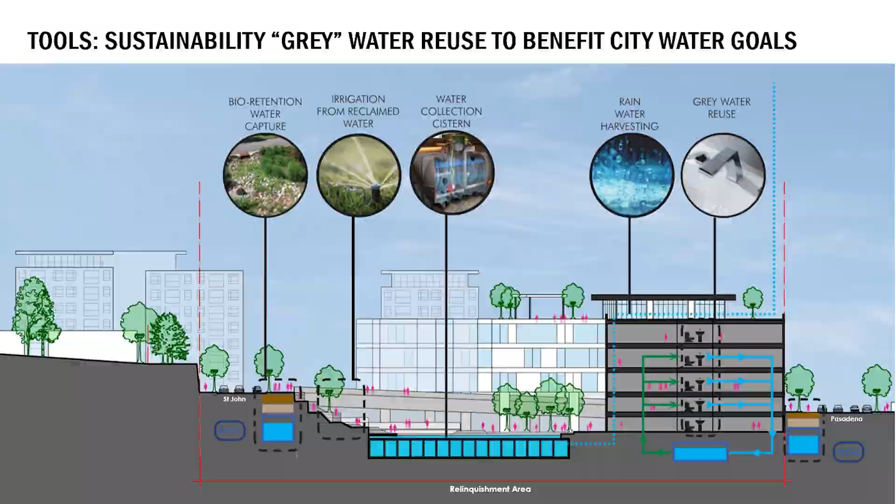So I think that's it. Okay, thank you, Kate. Just a few brief questions for the panel now — the first one I think Kate is going to take.

What ideas should we include in the vision plan to lead the way in green infrastructure and managing stormwater? I feel like I just answered that question. Then we'll go to question two.

In what ways will this project help move the city closer to its sustainability goals? I think there's a lot of ways. We talked about water, but one of the other things we're hearing, and we've been meeting with David Reyes' team about, is really their energy goals.

I think what we can do in the vision plan is get ready for net zero feasibility, which means we have a sense of how much energy could be used, and a generalized sense of how much renewables could be produced on the buildings we're placing here. We've also found, as part of the infrastructure investigation we're doing, some places where we could allocate for battery storage. So at this phase of the project, it's important to keep that end point in mind.

We know we want to be doing really high performance buildings. We want to be thinking about energy. We have to create the regulatory framework next, as part of Jennifer's team, to enforce a kind of development that can make those things happen. And we need to be sensitive about the economics of those things — whenever we push forward on really progressive kinds of energy or buildings, it does cost money. So that's one thing just to keep in mind.